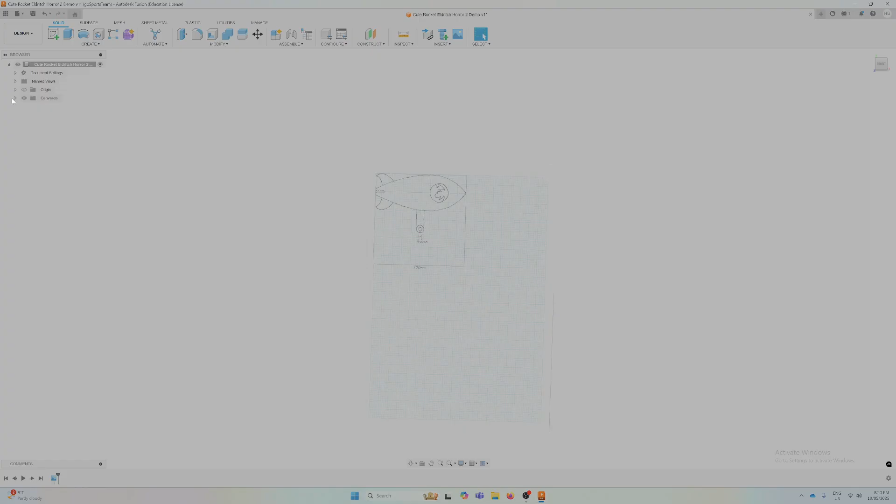Right, and zoom in on that and bring it to the front. Whoa, so we've got to do some fixing here. So the first thing I'm going to do is just make this nice and level. So I'm going to move it and let's just right click on this. Whoa. I got rid of that there for a second. Let's go canvas, and what can we do with this? We can edit the canvas.

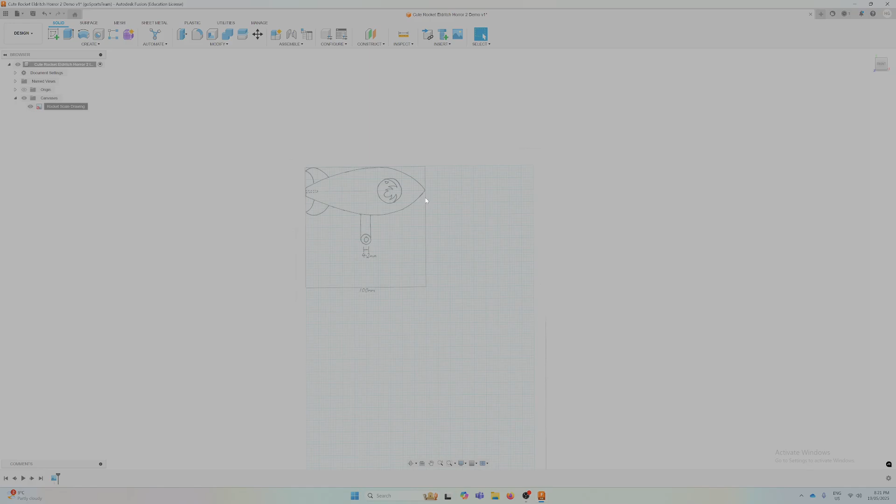Beautiful. If we can edit the canvas, what we can do is we can swivel it a little bit. So let's just move it. Clearly 1 degree is too much. What if we move it 2 degrees? That's not bad. That'll do. That's pretty level. It'll do. Anyway, and then what we need to do is we need to scale that. So we are going to go calibrate.

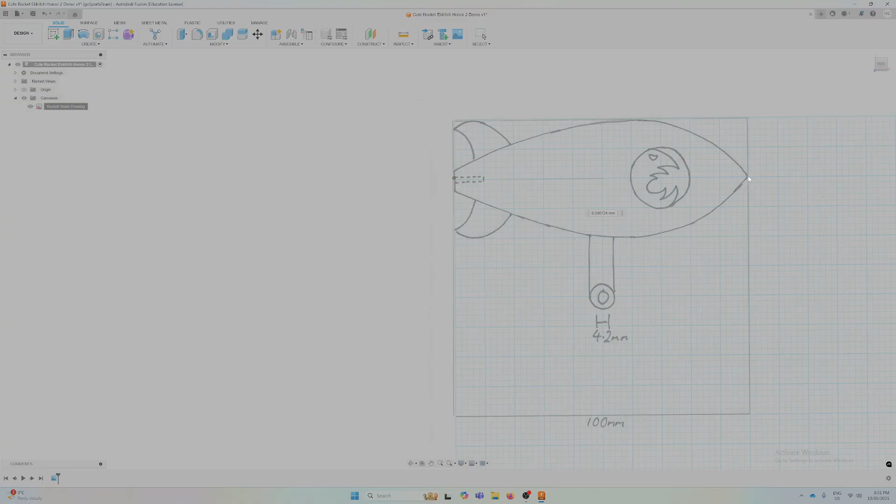And conveniently, I know that from the back of my rocket to the front of my rocket, or this bounding box, is 100 millimeters. So what I can do is I can click the back and the front, and I can then type in my dimension in millimeters, and there is my drawing, and it is scaled. Sweet. So now that we've got that there, we can start putting our sketch over the top of it. So go to Create Sketch, and we're going to create it on this plane.

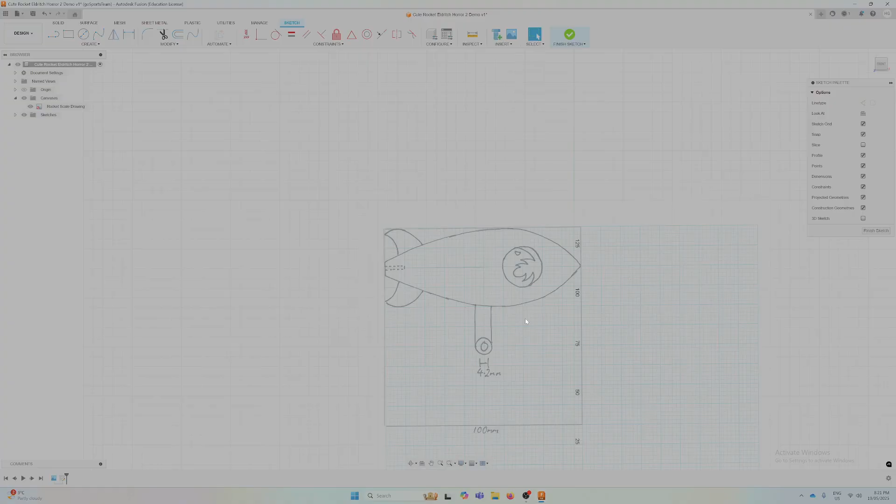And what I would do from here is I would put a rectangle around this thing. So I'm going to choose a construction line, and just like we have a bounding box here on our pencil drawing, we're going to have a bounding box here in our sketch. So just from corner, and make sure that that is 100 by 100, because this is actually going to define the physical dimensions of our part, and the maximum size it can be is 100 by 100. So you need that.

And then from here, I'm going to lay out a center line because this is a symmetrical object. And so being a symmetrical object, it makes it nice and easy to make it if I have a center line. So I'm just going to draw this center line and make sure that it is 90 degrees to the edge of your bounding box here. And you can see we've got angle there.

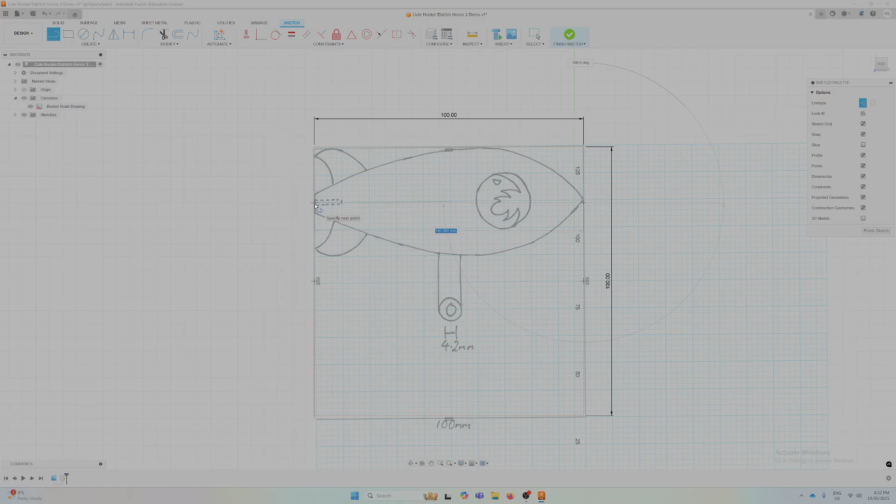When we move it to 90 degrees, or rather this one's measuring 180 degrees, we can see a couple of things. We can see that we've got 180 degrees at the top, and we can see a little square in the edge. So we can click and know that that is perpendicular. That's the word I'm looking for. If you want to make it perpendicular, what you can also do is you can go to one of these little constraints, and you could actually fix that if it wasn't perpendicular.

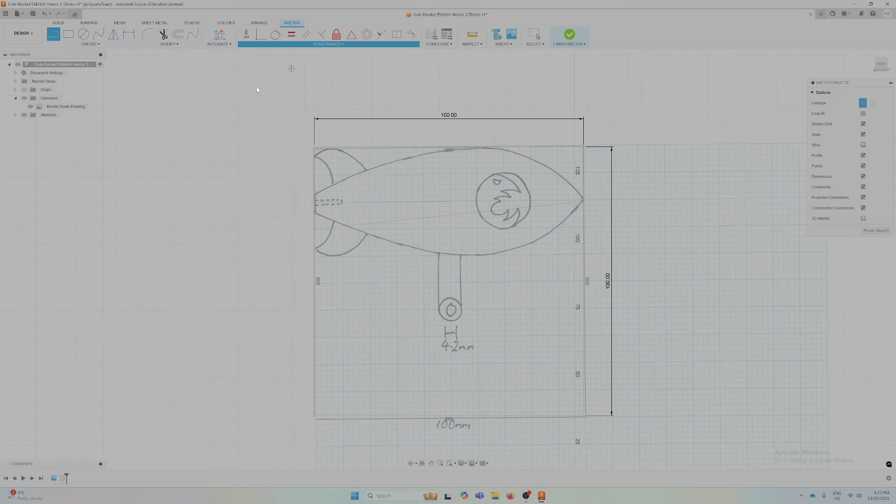Let's draw one that's not perpendicular, just for fun. Here's a line. All right, that's there. Clearly not perpendicular, not even close to perpendicular. Come up here to your constraints, perpendicular. And we're going to go this line, make it perpendicular with this line. And that will snap it to perpendicular.

Next thing we're going to do is dimension that line. So for me, I know that this was 40 millimeters. And so I know that I really want this line here to be 20 millimeters from the top of this. So I click my line, and then I click what I want to measure off.

I put in 20. And from here, I'm going to start actually doing some solid lines. And I'm going to use the fit point spline, which is a tool that you maybe haven't used before. So fit point spline, I'm going to turn off construction, and I'm going to start from here.

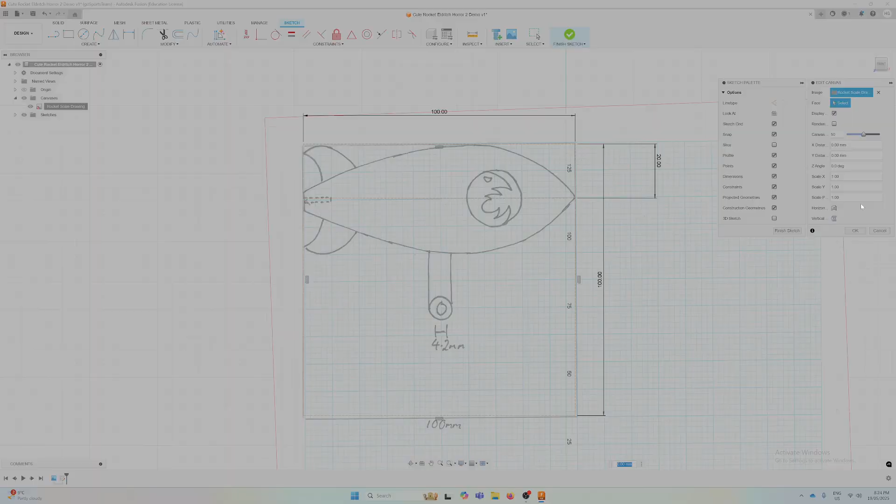Now, just before I do that, one thing that might be worth doing is I'm just going to hit escape. I'm going to go back to this rocket scale drawing. And what I'm going to do is I'm just going to see if I can turn down the opacity. And what does this say? There we go. So I can just turn down the opacity just a little bit. Makes it easier to see my actual sketch dimensions. Cool. Back to lines. So fit point spline.

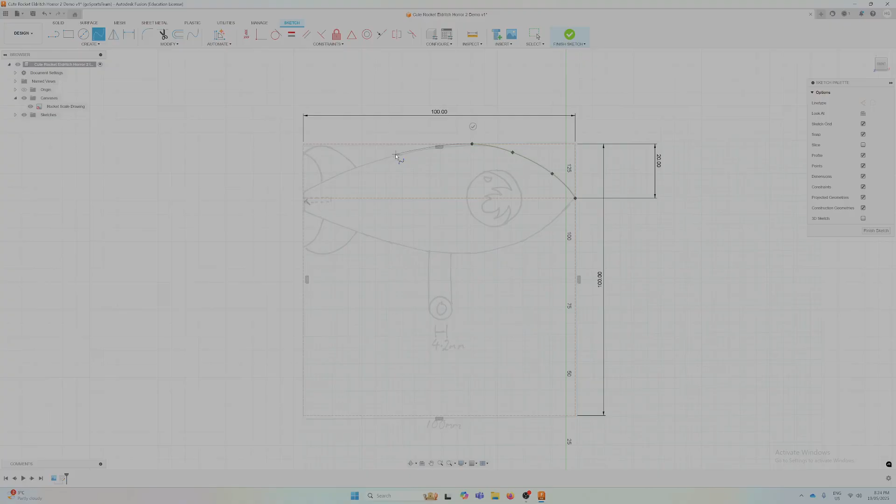So the fit point spline is pretty simple. You click once, and then every time you click from here, you lay down what you would call a fit point. And I'm just going to sort of follow my rocket, but also you don't have to be completely bound by your underlying drawing. If you think that smoothing out some of these lines or doing some stuff like that makes it look better, then by all means do that. All right, so hit escape.

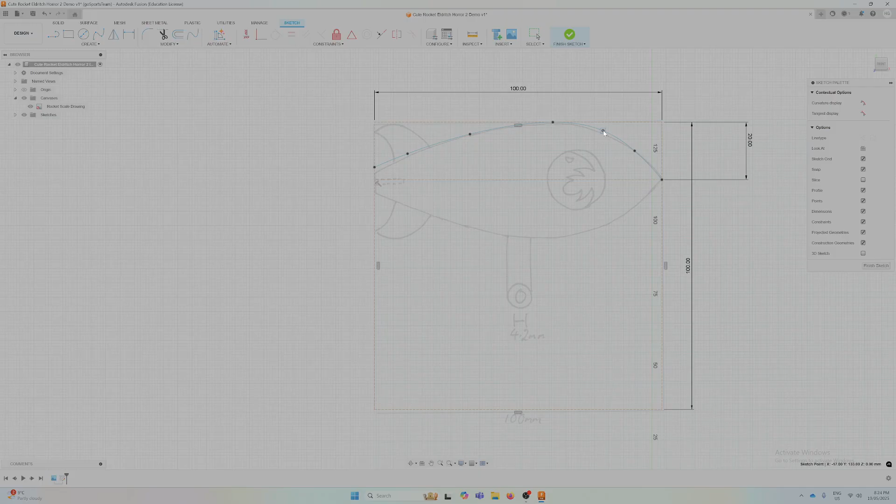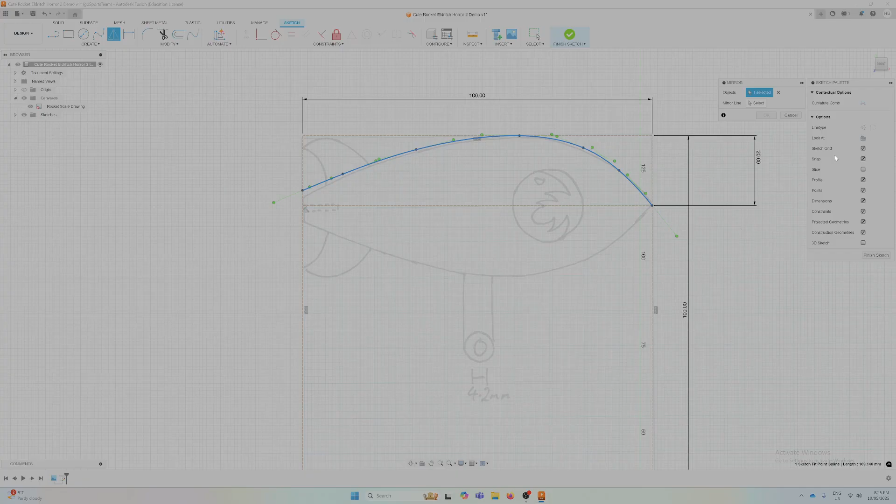So with these splines, you can click them and you can move them, which will change the shape. So I'm just going to move these just a little bit so that I get a slightly smoother set of arcs through my design, because I think that looks nice. Yeah, that'll do. And once I'm happy with that, I can click this line. And because my design's symmetrical and I have this center line, I can use the mirror tool. Right, I've already got this line selected, so I select my mirror line, and I get one down the bottom.

Cool. And then I can choose my line, and I can close that shape, and see how it changes color? Now I can click on it, and I can extrude it up and do all sorts of things with it. Right, so that's a good place to start.

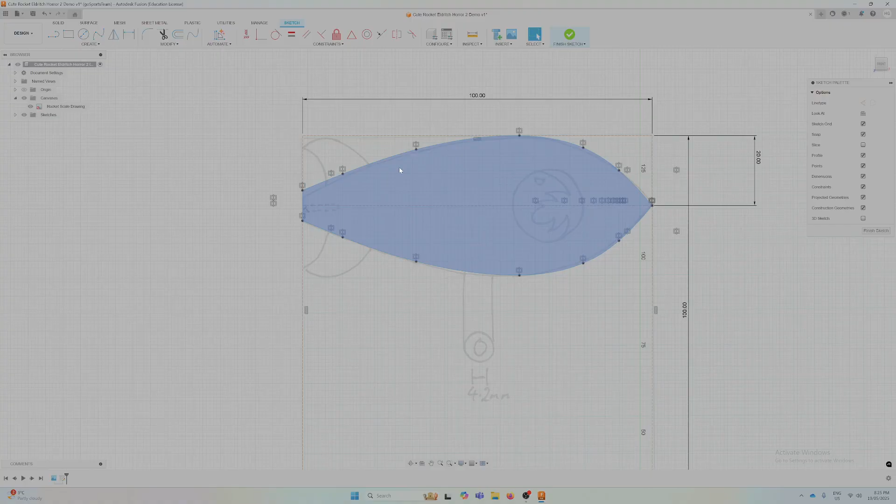Now from here, I'm going to draw some fins in, and to do the fins, I am going to use first an arc tool, and I'm going to use a 3-point arc. What a 3-point arc lets you do is you get to go start, finish, and then you can choose your arc. Right, and if I zoom in, I get a little bit more control. Right, there's my arc. And then you could use an arc to finish this.

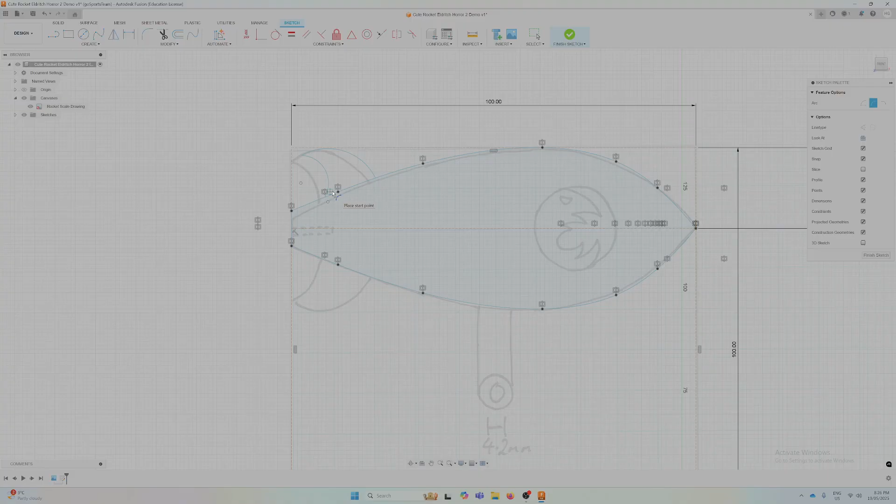That actually looks pretty good. I was going to say, I don't like the arc. I'd much rather use a fit point spline, but that actually looks pretty decent. If you wanted to use a fit point spline, of course you could. You could just go like that. Right, and there you go.

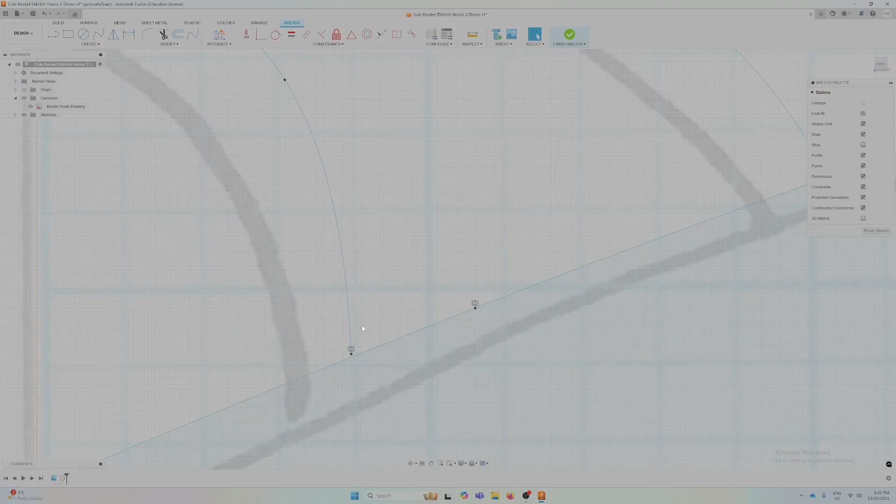Now, notice something important here. This is not blue. I can't extrude this. I can't grab it. I can't click on it. And there is a reason for that. And the reason is, this is not joined on, so it hasn't made a solid shape. So if that's the case, you got to close this before it will behave itself. And so you can grab these and you can drag them around, and that's what I just did there.

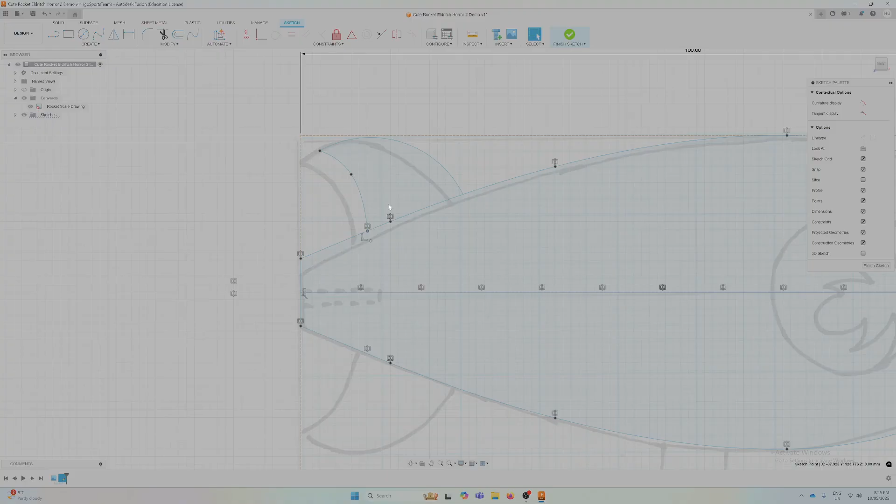So once you close a piece of geometry, and that's what that means, there's no gaps, then you can select it and you can do stuff with it, like extrude it up. Cool, so once again, symmetrical design, mirror line, mirror that out. There we go. Cool, and then let's throw this window in there. And again, symmetrical design makes it real easy. 20 mil, there we go.

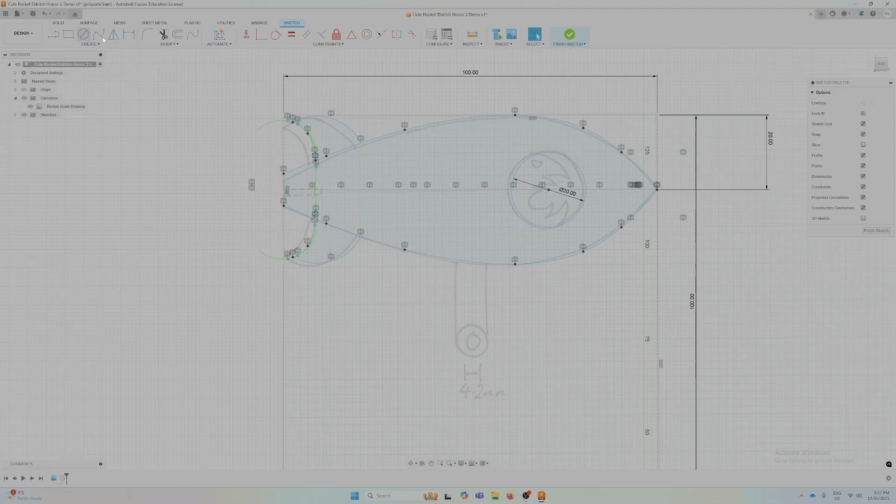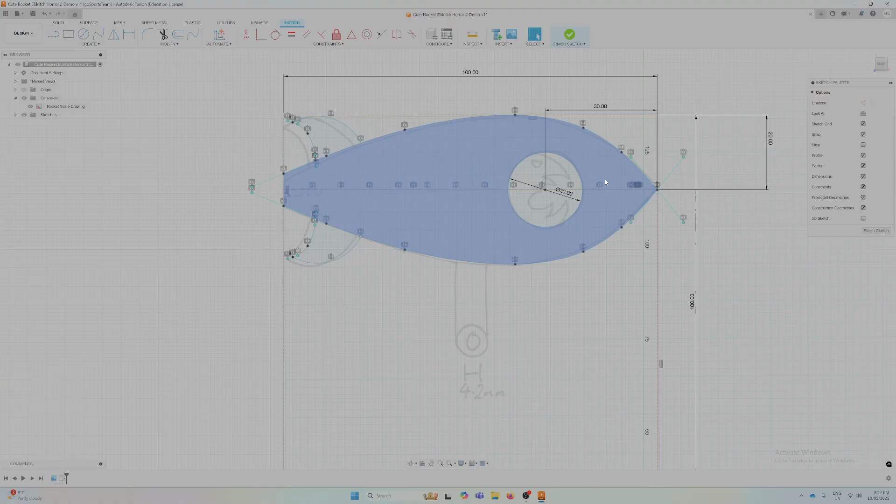And I can dimension that off the front of my rocket. And I am really passionate about having intentional numbers on things. Just designing things to be like an actual dimension, not just putting things in random spots. So I will dimension pretty much everything I do, even if I'm doing something that's more of an artistic kind of project. I've still got dimensions on everything to make them nice numbers that are actually intentional rather than just random stuff.

I'm not going to draw this little face in here just at the moment, and I'm going to move on with the rest of the rocket, and then I'll show you why that is. Now, what I know from my drawing and my planning is that this is supposed to be 50 millimeters from this back edge. And there's a couple of different ways I can do that. I can just draw a circle.

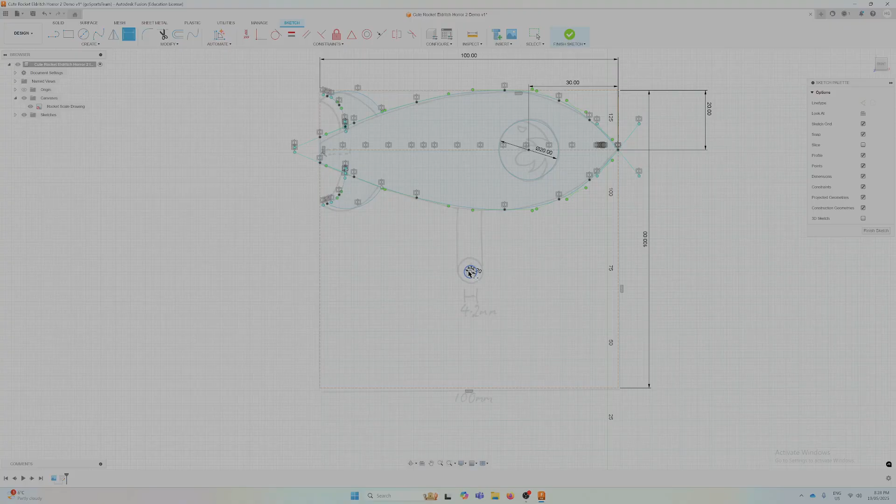And that circle I know needs to be 4.2 millimeters. And I can dimension that off this edge line, pretty close, and make that 50 millimeters. Right.

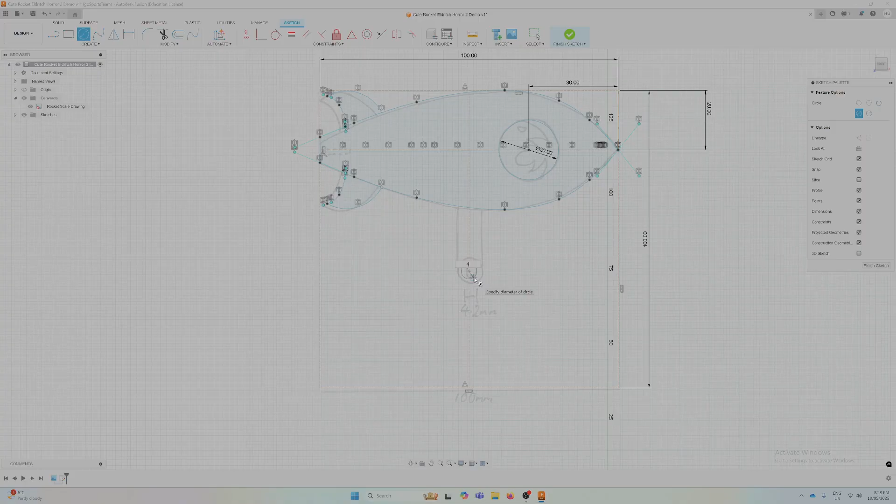The other thing I can do is make a construction line. By the way, pressing X will toggle construction lines on and off, pretty handy. I can find the center of this 100 millimeter line. When I get to the center, I get this triangle symbol, so that tells me I'm in the center. So then I can lay a center line out, turn my construction lines off, and put in that 4.2 millimeter circle again.

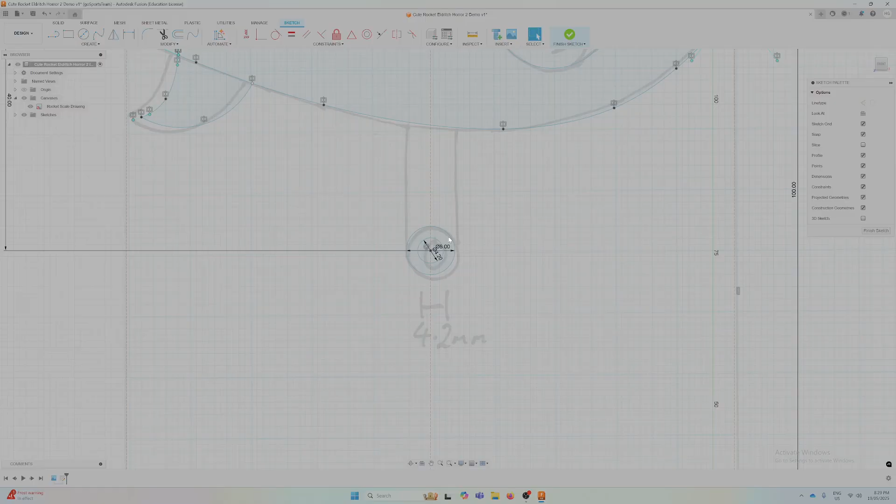Now again, intentional numbers, not just random stuff. So I'm actually going to dimension that off the center line of my rocket. See, it's close to being a nice intentional number, but it's not quite. So I'm going to make that 40 millimeters, and then come in and make this—I think I wanted this to be 8 millimeters. I don't want this to be too small, right? The rim of this hole, for example, I don't want that to be too small because it'll be weak, but this is probably plenty. I could make it bigger if I wanted to. In fact, maybe I will. As I'm talking, let's make it 10.

And then from here, line. With this, you're going to struggle to get a line right off this nice edge. Like if I lay a line out, it's not quite at the edge. A couple different ways you can sort of get around that.

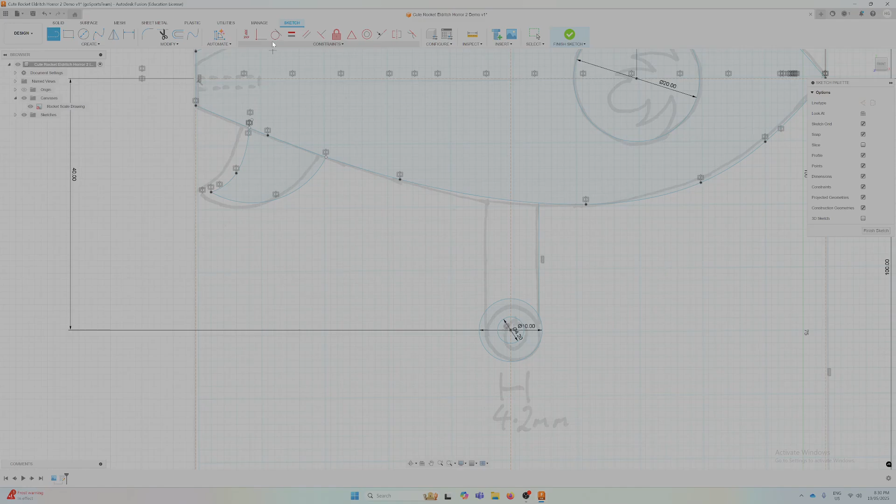So for a start, this line here is parallel to this line here. So if I move this line, it's always going to stay parallel to this guideline. What I can do is use the tangent constraint, and say hey, this line, which is locked into being parallel with this line, I want it to meet this circle at that sort of tangent point. Now that's moved everything, which is 100% not what I wanted.

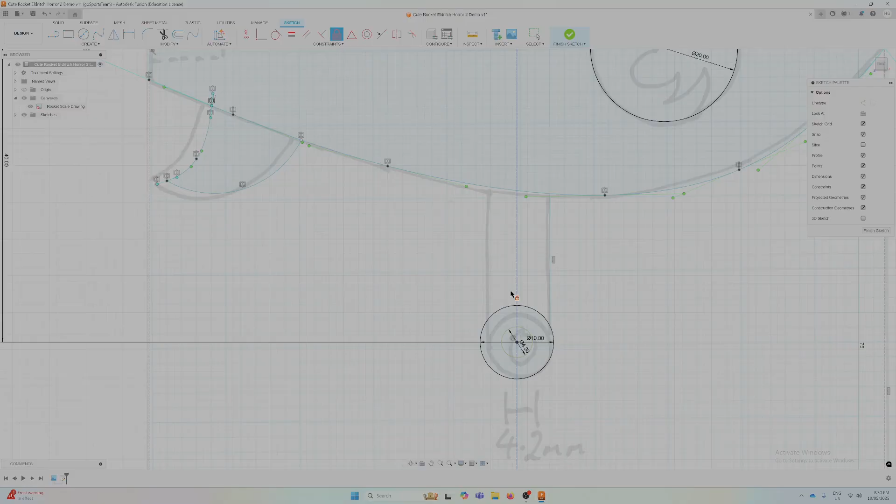So there is a way to fix that. What we do is grab one of these and lock it down. We just click fix, and they go solid black, meaning they don't move. And so this time, if I click on this, it will move that line. Right, so that's one way to do that.

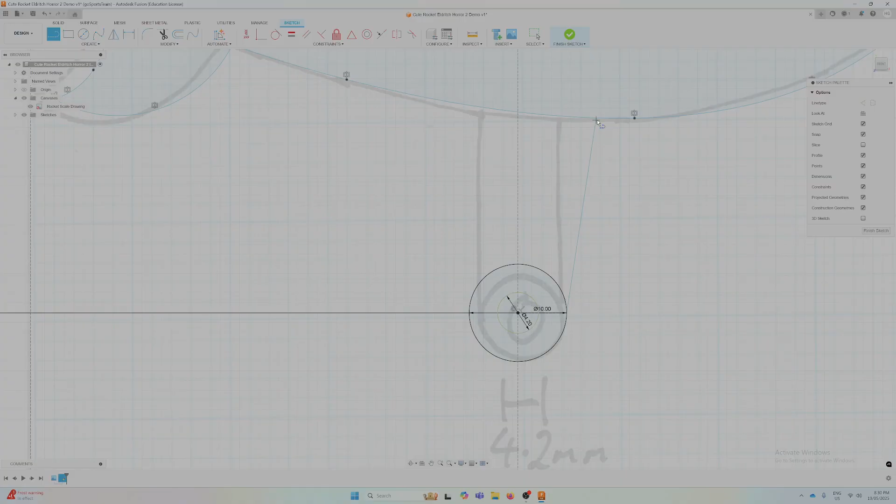I'm going to Control Z a little bit, and let's just delete that line. The other way to do it is we can lay guidelines out. So if I go from the center of the circle out to the edge, I get that nice perpendicular constraint, or 90 degree, and then I can run up from that point up here. Let's not even make sure it's parallel—let's just put it on a wonk angle, and then we can take the parallel constraint and apply it to that line. Cool. And I can mirror that from there.

Oop, that's not what I'm trying to mirror. I'm trying to use that as the mirror line. There we go. And of course that doesn't actually join because it's not—this is not uniform. Or not uniform is the wrong word. Whatever word I'm looking for.

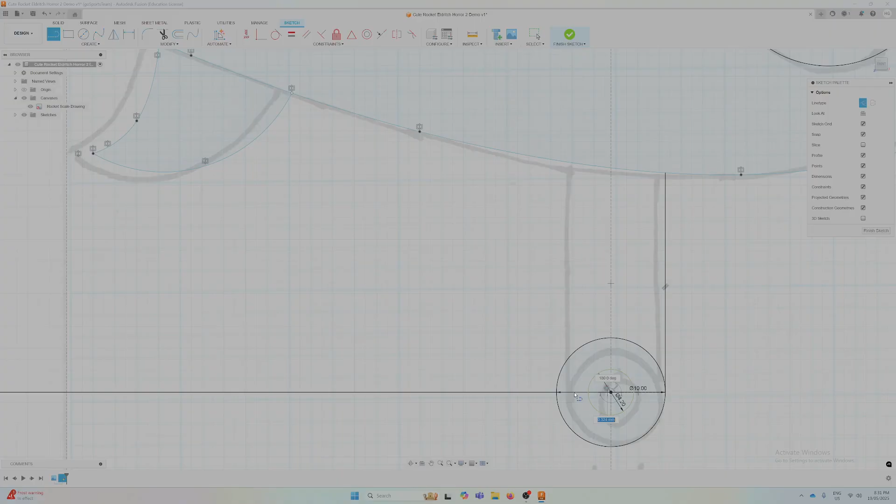So let's just do it by hand instead. Again, we can't find that point constraint—let's just draw a line out to that edge. And then we can get it on that point, run it up there. Let's put it on a wonk angle again, just to use that parallel constraint.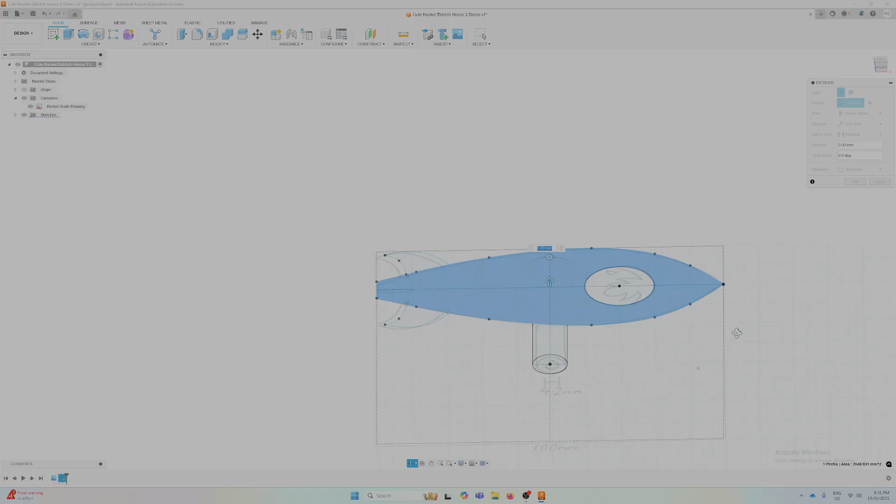Cool, and now let's extrude things up. Remembering that everything's got to be flat on the base, right? So if we're going to get depth and this illusion that things are at different points, we're going to have to do it while keeping everything flat. So this first thing, I'm going to bring it up 10 mil, and then my sketch is going to disappear. What a crisis. Come over here to the drop-down menu on the left and just unhide that sketch by clicking on the eye.

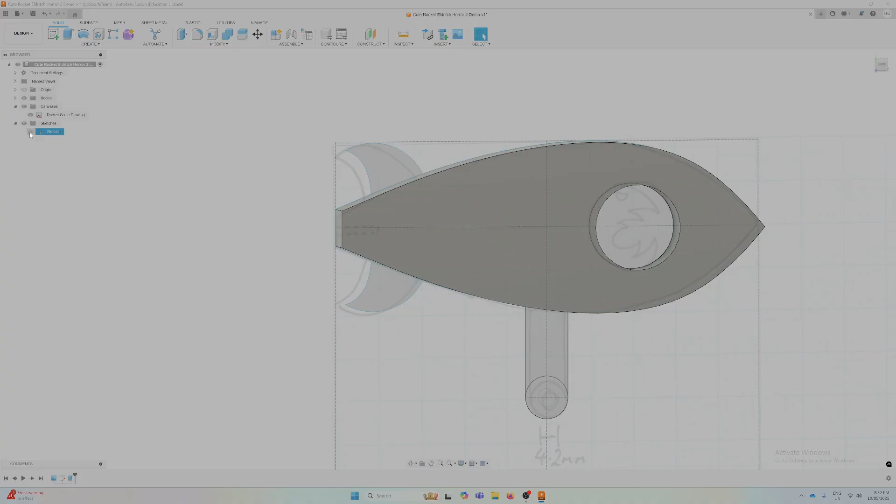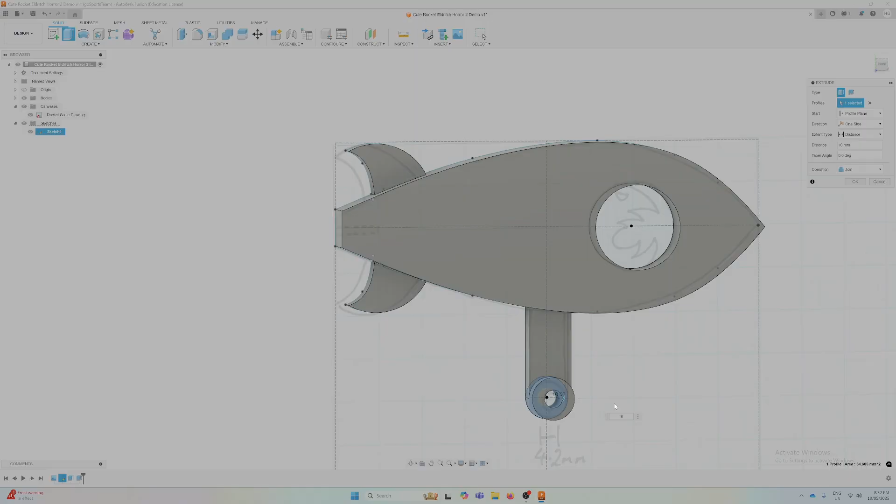It brings everything back. And then grab the fins, and the fins can come up 5 millimeters, and so can this thing, 5 millimeters. And then this circle, by the way, I'm hitting E instead of going to solid and clicking that, I'm just pressing the E key. This can come out 10 millimeters. Pretty happy with that.

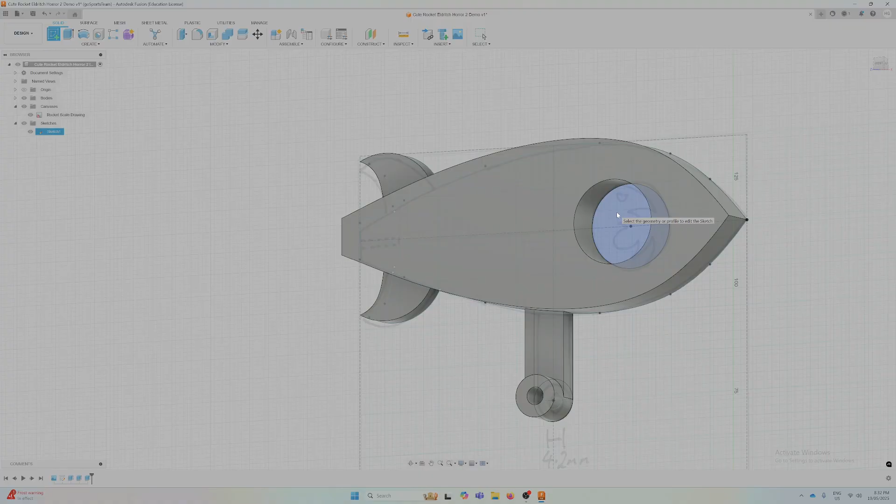Now, what I'm going to do from here is make another sketch to do my little Eldritch Horror, whatever, space face dude. So make sure that if you're making more sketches, you're putting them where you want. I'm moving the work environment around, and I can see I'm highlighting that surface—that's where I'm going to draw my face. Now, it might move the thing, which is a little frustrating—it's just moving it down to the origin. But we can just move back up.

So, Eldritch Horror—let's go in with our fit point spline. Now, here's what's going to happen: I cannot snap to this circle because this circle is not part of this sketch. So what I use is the project tool. You can find that in the sketch menu under project include, or you can just hit P on your keyboard. And what project lets you do is select things that you can bring into any sketch you're working on—see here, I can click this circle.

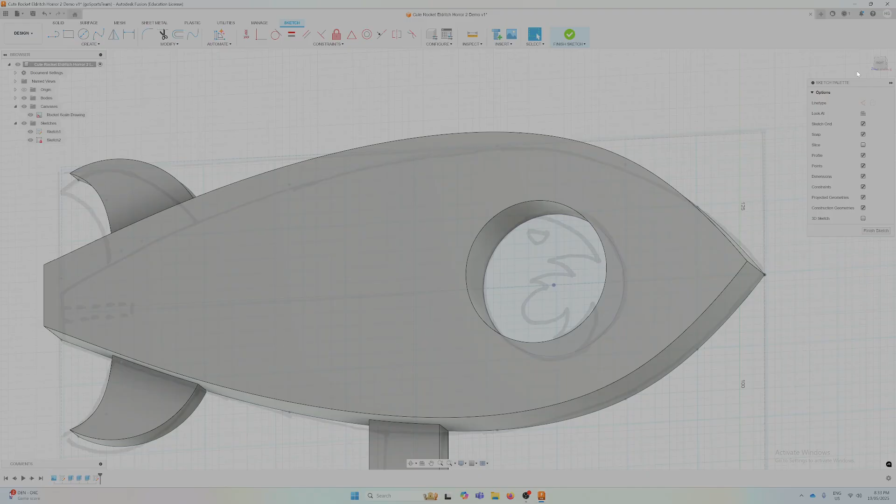Let me just hide the body real quick and hide the canvas. See how now there's a circle in this sketch we're working on. I'll hide the sketch too, sorry. So I'm going to draw my little Eldritch Horror in this sketch, and it's going to have this circle there, and everything's going to be good and dandy. So bring my canvas back, and fit point spline, off we go.

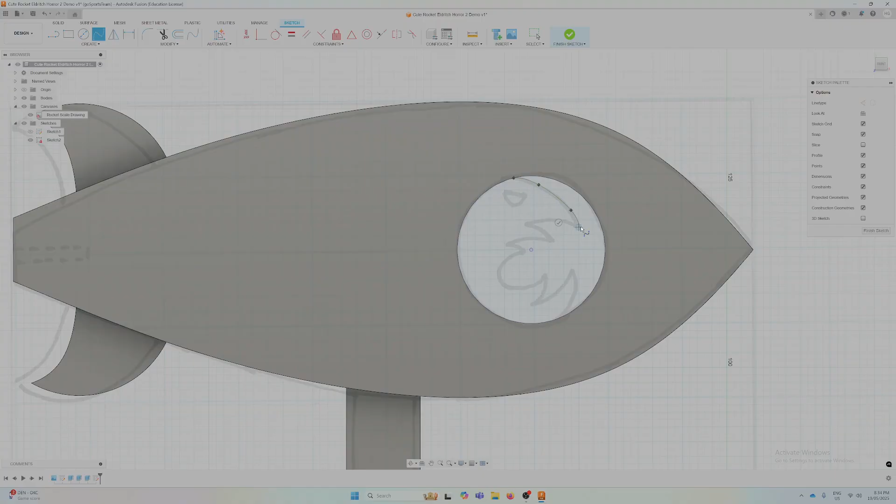Notice that I'm taking liberties with this underlying drawing—it's there to help me, but it's not something I need to follow religiously. The other thing worth noting about the fit point spline is that if you try a sharp angle on it, it'll just feed you curves. So it's not great. If you want sharp angles, you're much better off finishing one spline by double clicking, and then going from the next point. And what this lets you do is get those nice sharp edges if you want them.

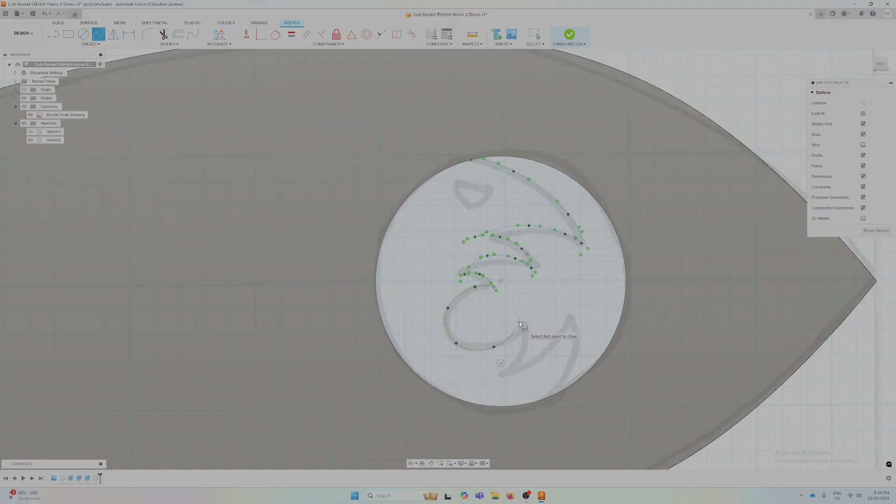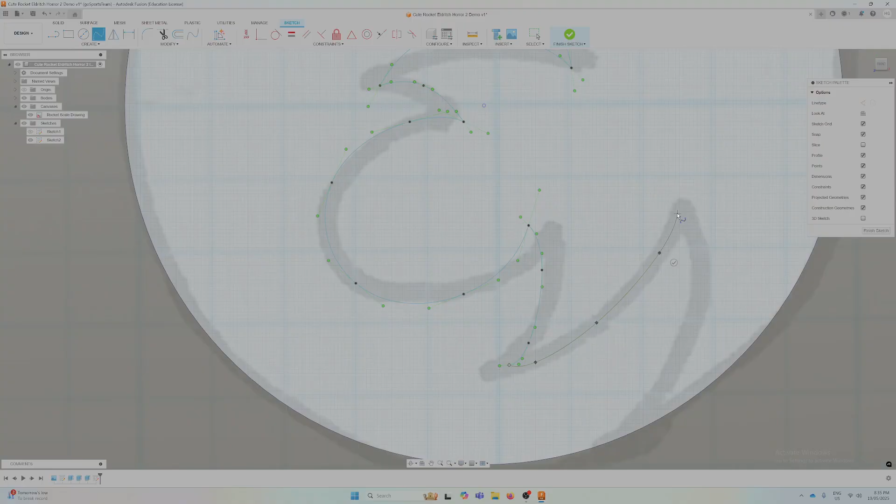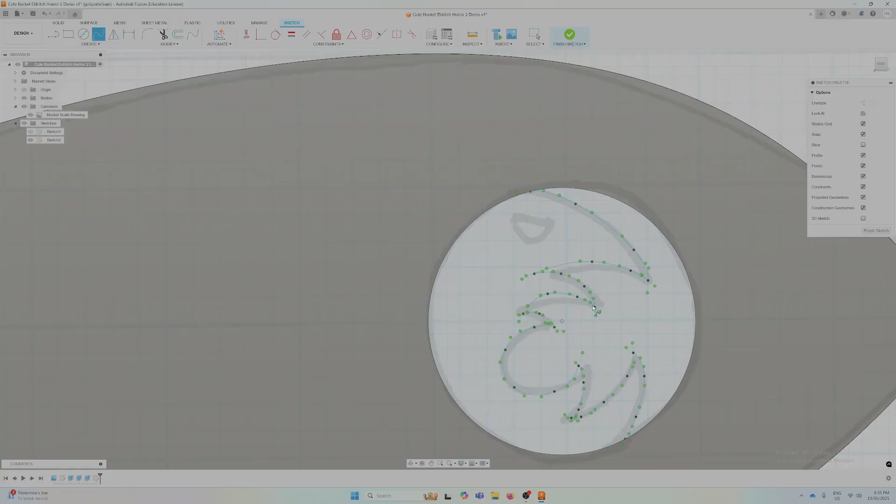Stuff that last one up. Let's come back in there, and by all means zoom in—manipulate your work environment to make your life easy, don't make your life hard. Stuff that one too. I'll be honest with you folks, I very rarely use the fit point spline—it's not like my tool of choice for things. All right, cool, there's my shapes.

Now, do I have an enclosed shape? Yeah, it turns blue, good. So that's enclosed. And then to put this detail in here, I'm just going to do a circle. And for details, you don't want to go smaller than 2 mil on any particular detail—if you go smaller than 2 mil, the printers might have a hard time resolving it. So I'm going to go 2.5.

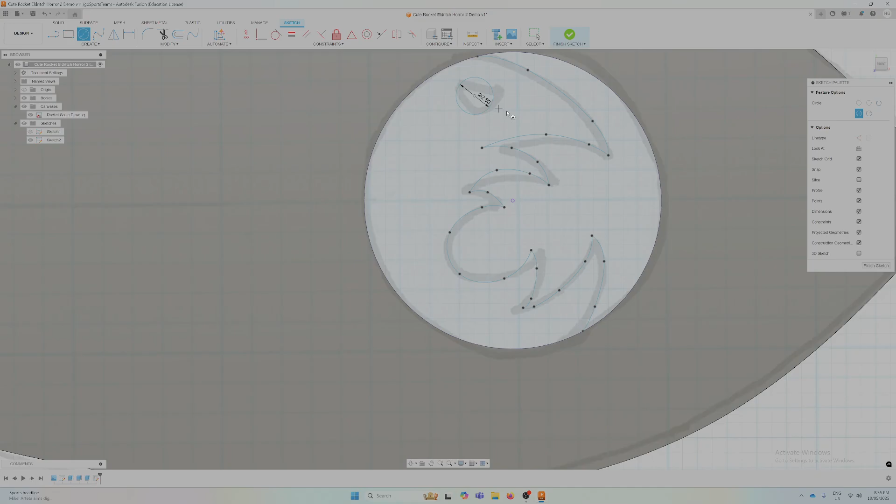That's kind of big and goofy looking, isn't it? Let's see what happens when we put a line in it—let's just have a look, and grab that, and grab that, and we'll extrude that up, 3 mil. And how does that look? I don't like that at all. Yeah, don't like that at all. So let's just get rid of that.

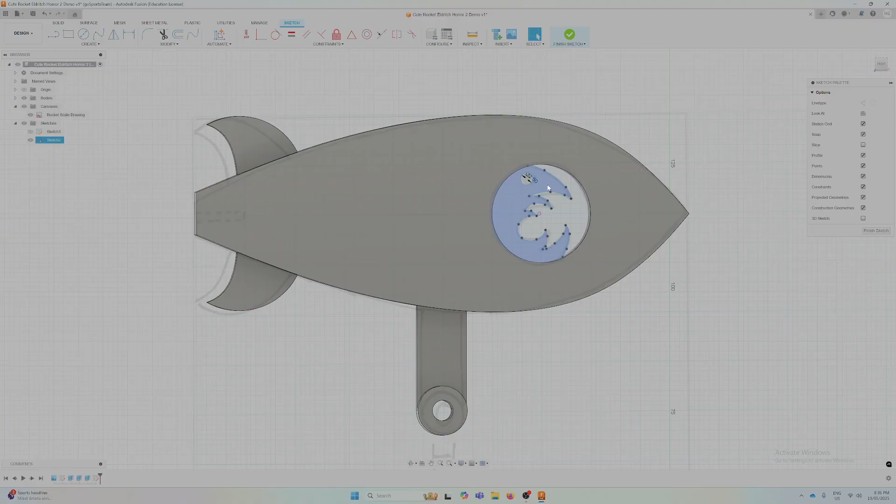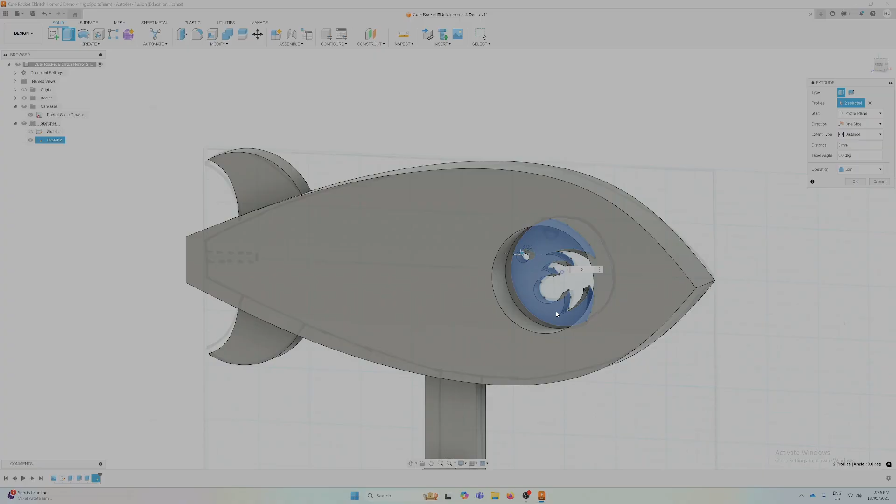I'm going to put it somewhere completely different, see if that changes the feel of the thing—more like an eye in the middle. Let's try that, see what that looks like. Now it kind of looks like a goofy man in the moon, so I like that even less. Alright, whatever, eye where the eye is—maybe we'll put it further out.

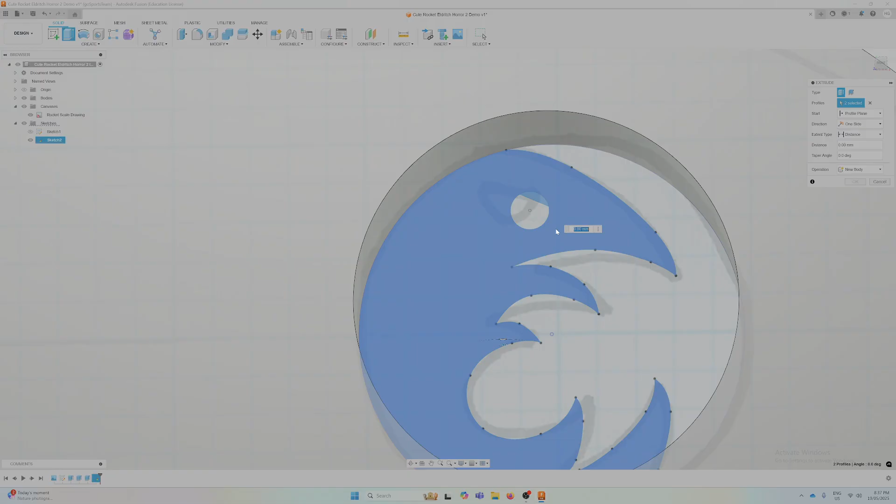And we'll just make it 2 mil, put a line here, extrude this out 3 millimeters. Yeah, I'm happy enough with that. Let's just have a look at that all as one. Yeah, that I can go with.

All right, so I'm just going to hide my canvas for a second, and I'm just going to show you an easy way to add a little bit more detail to make this look a little bit more interesting.

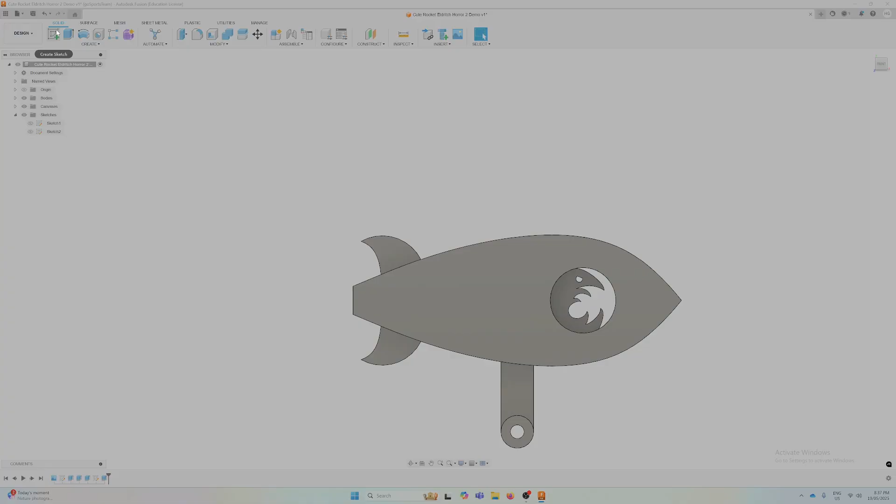So I want another sketch on this surface. Of course, it moves back there, but just move back to where it is. I'm just going to put a little rim, a little outline on this using this tool, which is the offset tool. Offset lets you grab a line and drag something off it.

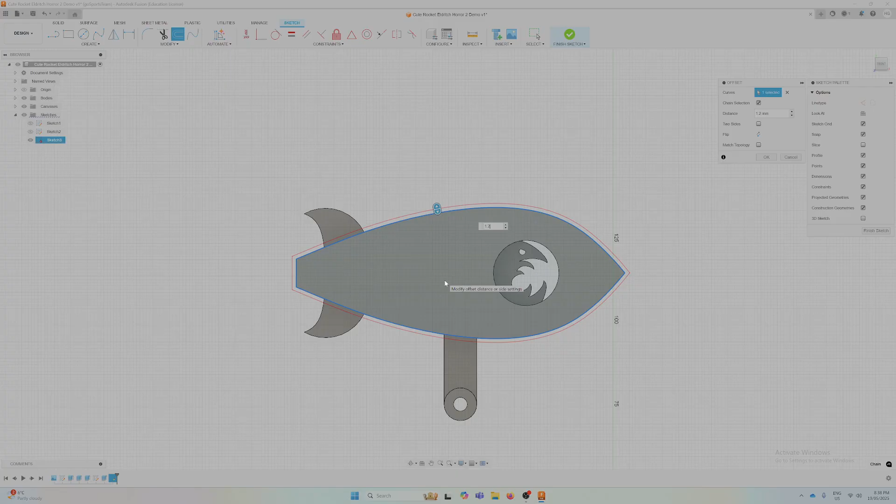Now, I know I said don't make a detail smaller than 2 millimeters, but this is the exception. Because of the way a 3D printer works, if you have something on the edges like this, you can make that any multiple of the nozzle thickness. The nozzle squeezes out plastic at a thickness between 0.4 on our finer printers and 0.6 on our thicker printers. So if you make this line a nice multiple of both 0.4 and 0.6, like 1.2, except in the negative direction, then if it's a 0.4 nozzle, the printer will run 3 lines around here. If it's a 0.6, it'll run 2, and it'll resolve that detail really nicely.

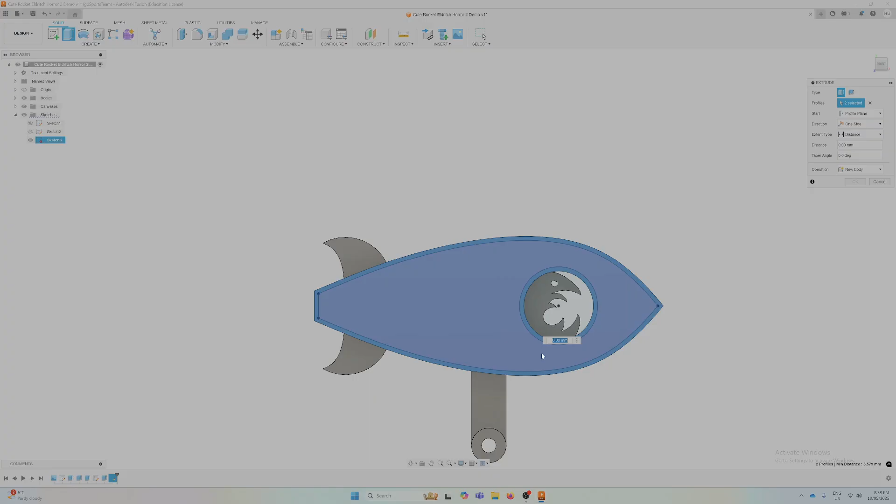So I'm going to do one there, again 1.2, 1.2, and then I'm just going to extrude those up, by a really small amount. We're talking layer heights here, so like 0.4, 0.5, 0.4, 0.6, whatever you like. It's just going to add that little bit of visual interest. It's going to make it look a whole lot better.

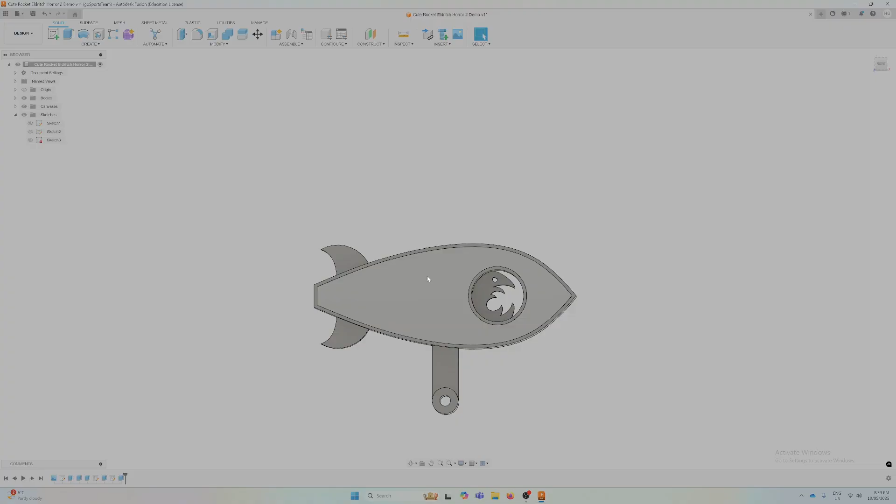You could do the same thing with the fins if you want. You could add more details to this if you wanted to. You could put little circles on here and extrude up little bolts. With little details like that, you do want to obey the nothing smaller than 2mm rule, but you can do all sorts of things with that.

And that is your design. Make sure you check it, right? Have a look at it from all angles. It should be dead flat on the base, because that's where it's going to stick down to print. We can't have any overhangs. We just want it to sit flat on the bed while that gets printed.

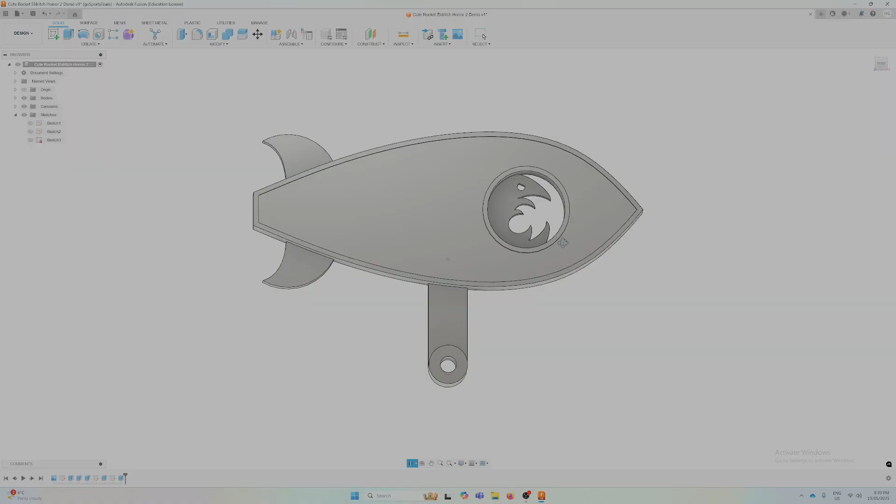So from there, it looks kind of jank. From there, I don't think it looks half bad. Now, make sure you save that. Stop doing that. All right, make sure you save it.

And then from here, you are going to need to export that file for printing. So come in here to where it says body, and you are going to right click on that body. Come down to the option that says save as mesh, and click on that. Now you might need to change some options. We are going to use STL binary, and this should say millimeters, but if it doesn't, flick it to millimeters, and that should be it. You don't have to mess with anything else, just STL binary, make sure it's millimeter, click OK.

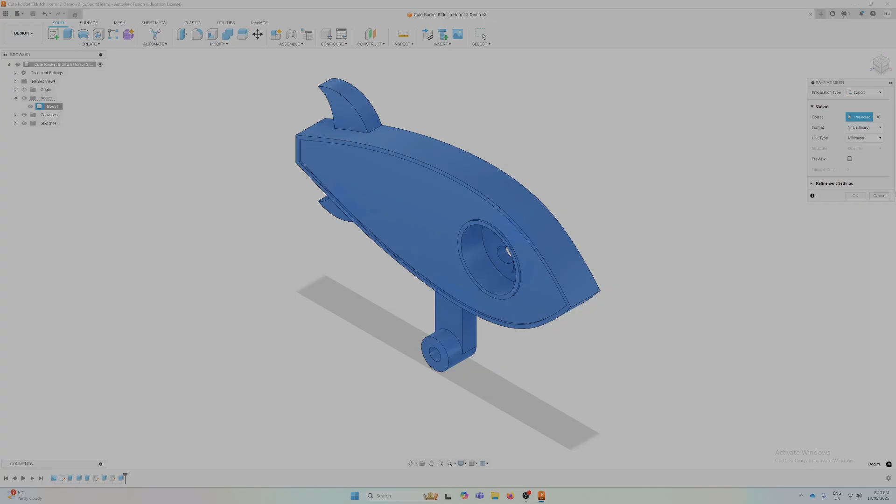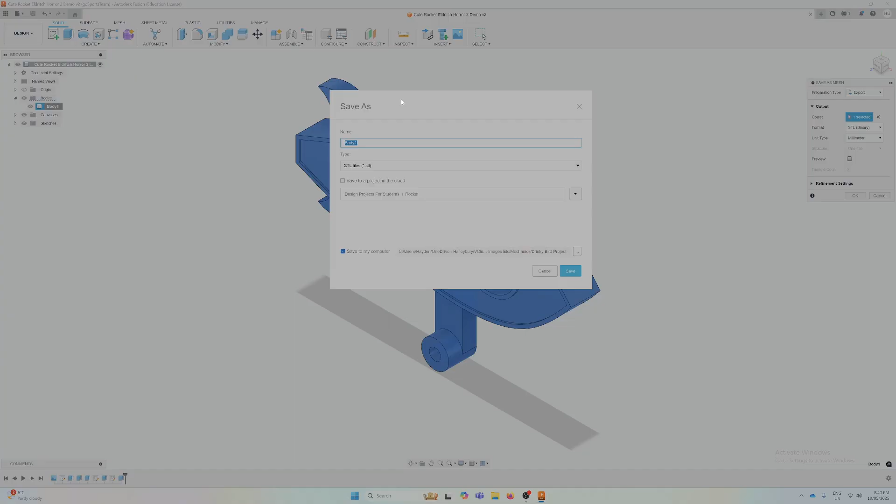And what this will do is it will ask you where to save it. So please make sure you click on this, and put this somewhere logical. I'm going to put it here. And you can name it something sensible. So when you name things, I want them to be named your name, so me, and then what it is. I'm still not entirely sure what we're calling this project, so let's just call it tilt project piece.

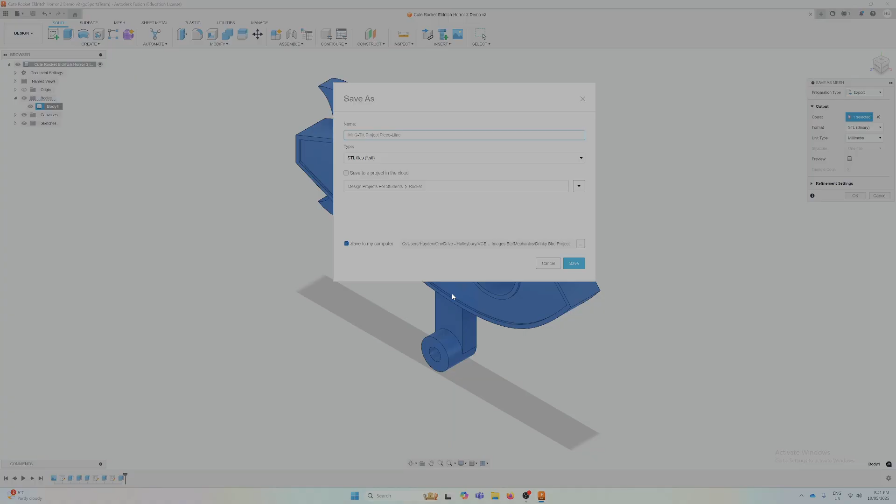And then depending on what you're printing, you might get to say, hey, I want it to be this color, or that color, or whatever. At the moment, you're not getting a choice. We'll run some colors and you get to pick from that. So whatever color we tell you is on offer, you pick one of those. So I'm going to say lilac. I don't know if that's how you spell lilac, and I don't really care. Cool. And then you're going to save that.

And that's the file that you will then go on to slice up and print in the 3D printer. Cool. I think that's everything. That's how to design the thing.